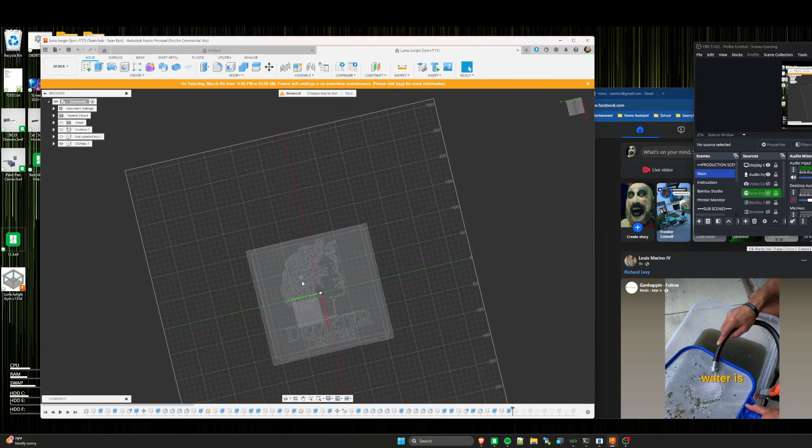What I'm thinking is, if I make this flat and you do multicolor, I can cut this right here, add little tabs, and then holes in these so you can snap them and glue them together. I could make snap tabs, but that's going to be a lot more difficult to do.

So let's do this. Let's start by making these flat. Let me see what you've got here.

Okay, so that's some kind of box. All right, I don't need to worry about that. What am I on this? Okay, so this is what I'm on. I've got one body.

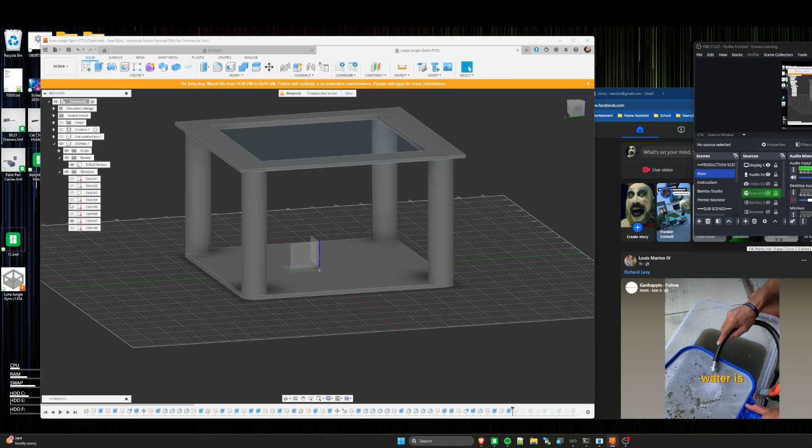Why do you have so many sketches? You have a lot of repetitive sketches. I don't know if that's on purpose.

Yeah, see this one, where is it? This one and this one, just do it in the same sketch. You can just make one sketch with both the rectangles. You don't need a bazillion sketches. This could be done in that same sketch.

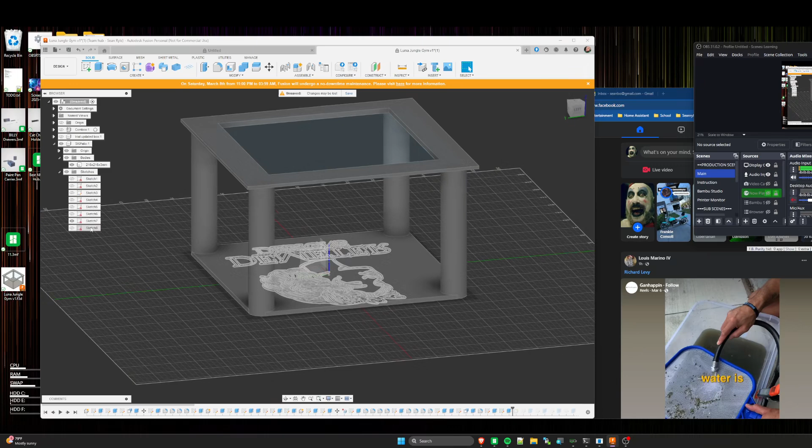Okay, that makes sense. I need to see all these sketches. It helps also if you name your sketches too, like you did these other guys, like the body.

All right, so let's start with this. We're going to start with this. We're going to make this flat.

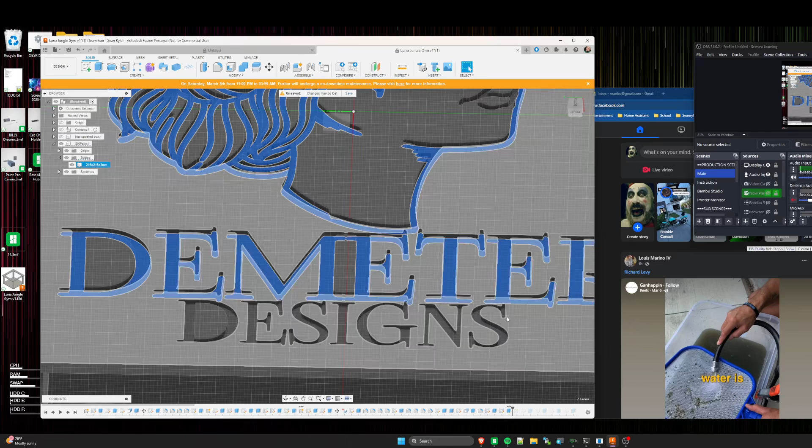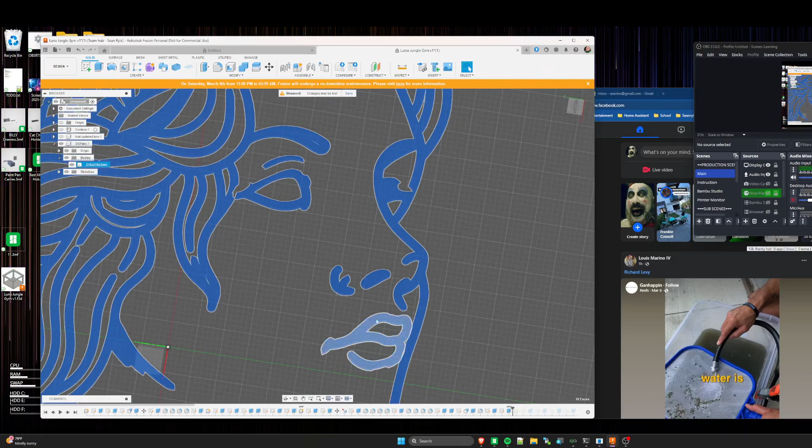So I'm just holding Control and selecting these faces. Make sure not to select any lines, you just want to select the faces. Make sure I get them all. I think I got them all.

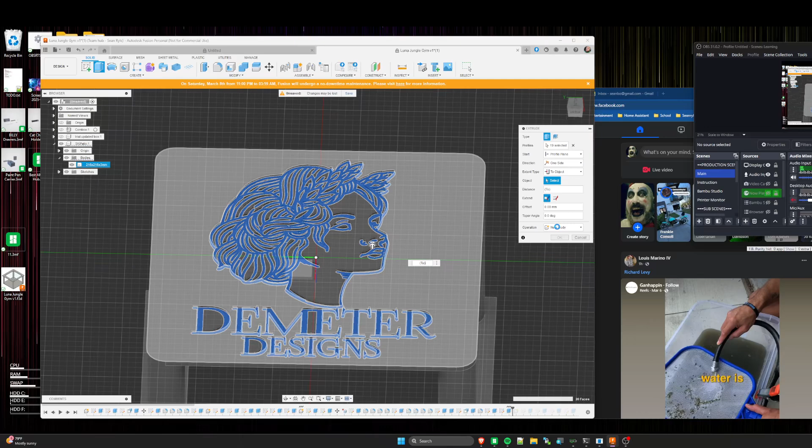Okay, so now I'm going to do an extrude, and I'm going to set type to object, and I'm going to select the face, so that's what it's going to be flush with. And then I'm going to choose, as soon as it stops spinning, choose new component, and hit OK.

All right, 20 faces, that sounds about right. So it's calculating. You can see down here it's calculating.

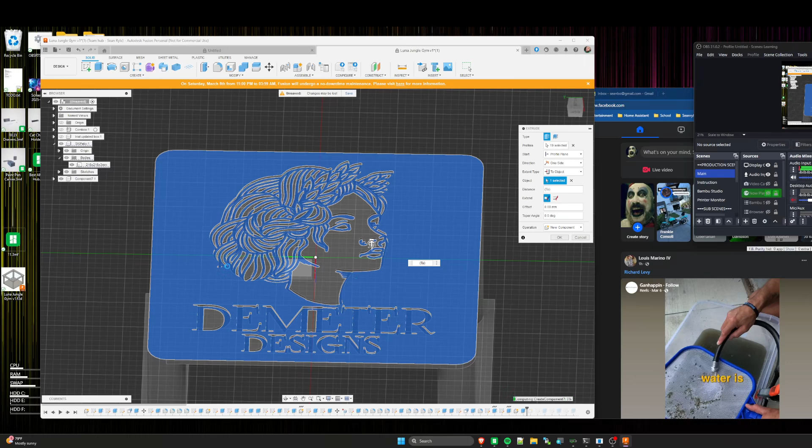So by doing it as a new component, this actually will allow you to do it either way. So when you export this, if you want it flat, it's going to create a body for each one of these faces. You can't get around that because they're not really joined in any way. You can't combine them into one body, which, it's actually okay.

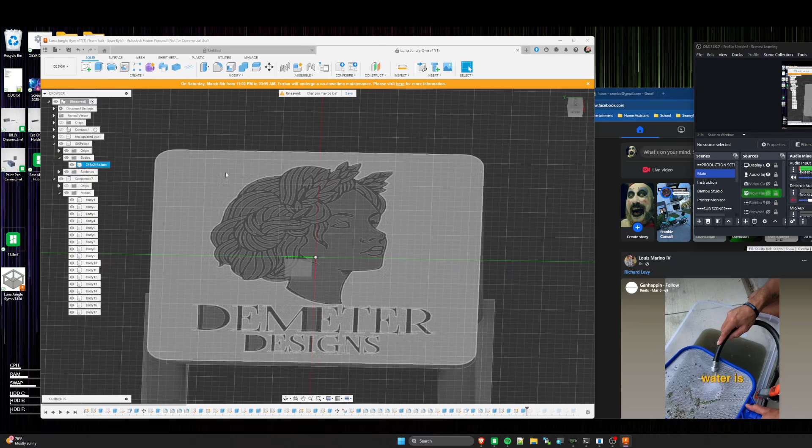So what you can do, if you want to export this flat, make sure all these are visible and this body for this thing is visible. If you want it debossed or embossed, whichever way it is where it goes in, just hide all these bodies. So when you export it, it'll export it with the holes.

So you can have it both ways, you don't have to do it one or the other. It just depends on how you export it. You want to export it for multicolor, make sure these are all visible. You want to export it so it's embossed and you only have one color, turn all these off.

So I'm going to do this. I'm going to call it logo. I'm not going to rename every one of those.

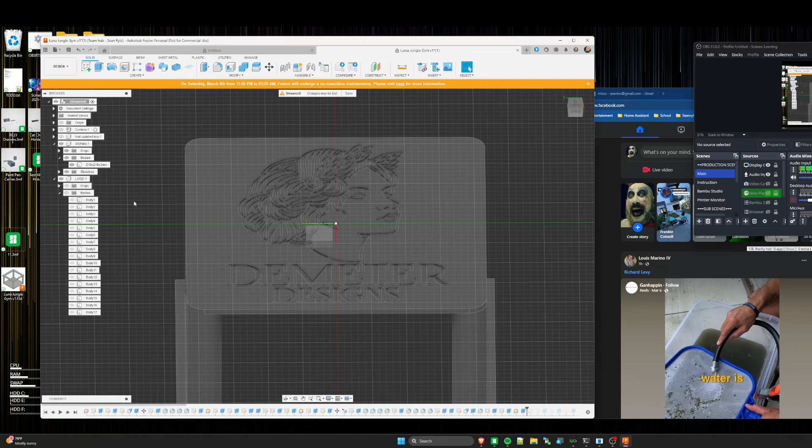Okay, so I'm going to leave these visible because I want to export it that way. Now, what we're going to do is I'm going to cut this into two different bodies. So here we'll see two different bodies.

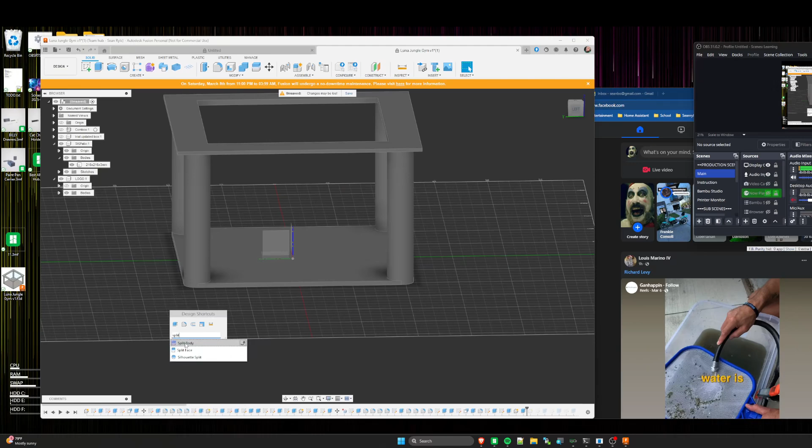Okay, so what I'm going to do is I'm going to hit S, and I'm going to type split body. Okay, so here, split body. I'm going to select this body, and it says splitting tool, I'm going to hit select.

And I'm going to use this face to split it. So it's going to split it at the very bottom, or the very bottom of this thing, right here along this line. Okay.

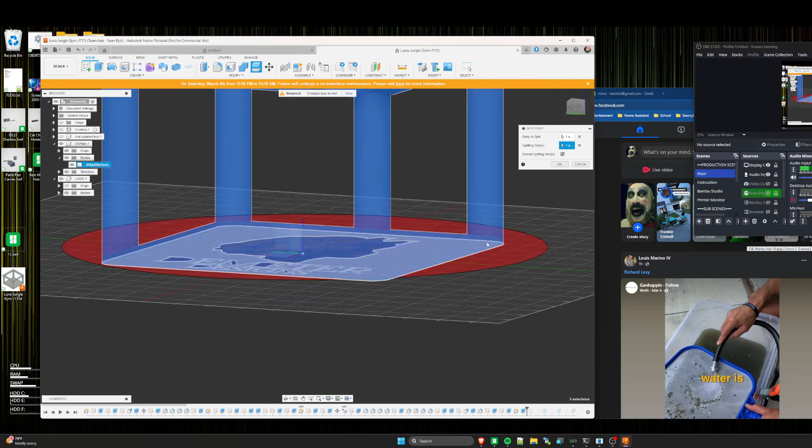So now you see we have two bodies. You have the top portion and the bottom portion. Okay.

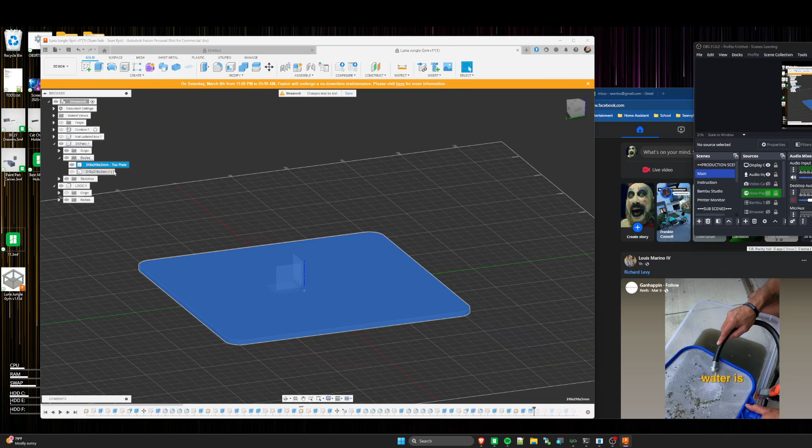So let's do this, I'm going to call this top plate. And I'm going to call this, I don't know, bottom assembly. Okay.

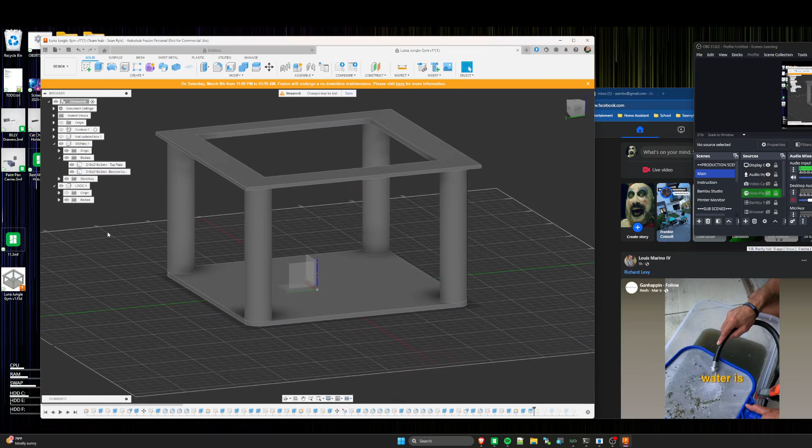All right, so now that we have these separate pieces, what we can do, I'm going to create a sketch on here. Create sketch. Where's that sketch you had with the circles?

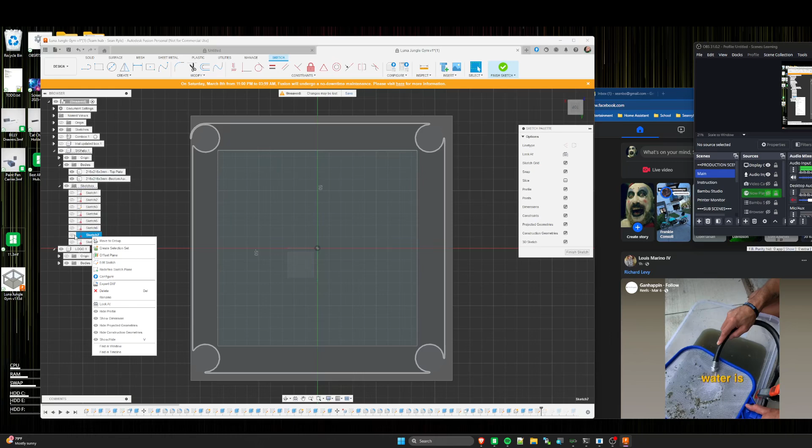Okay, so here, I want to make this sketch visible. I'm going to hit S, and I'm going to project.

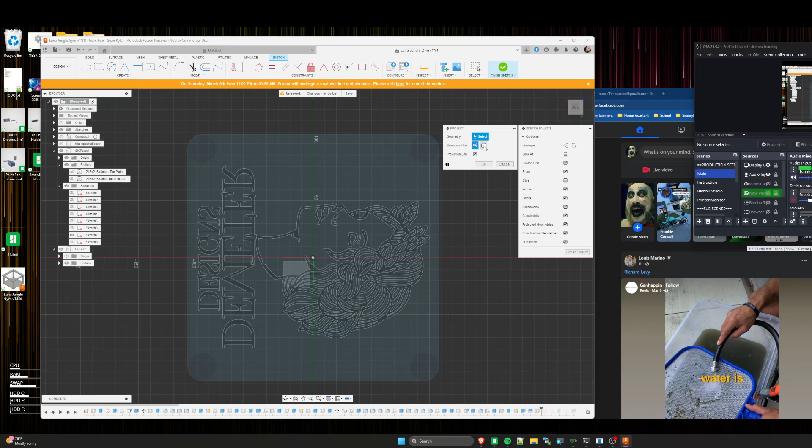Let me hide. Why did it do that? Bodies. I want this. That's not going to work.

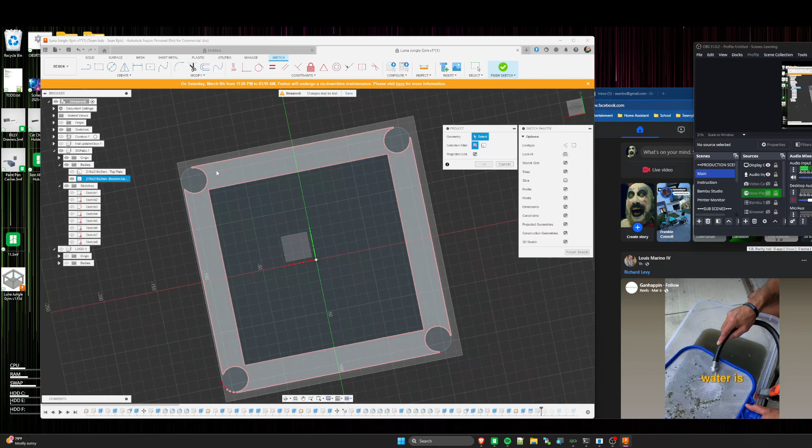Okay, this is what we want to do. Let me hide that, I don't actually need that sketch. So I made just the bottom assembly piece visible. I'll explain why I'm doing this in a second.

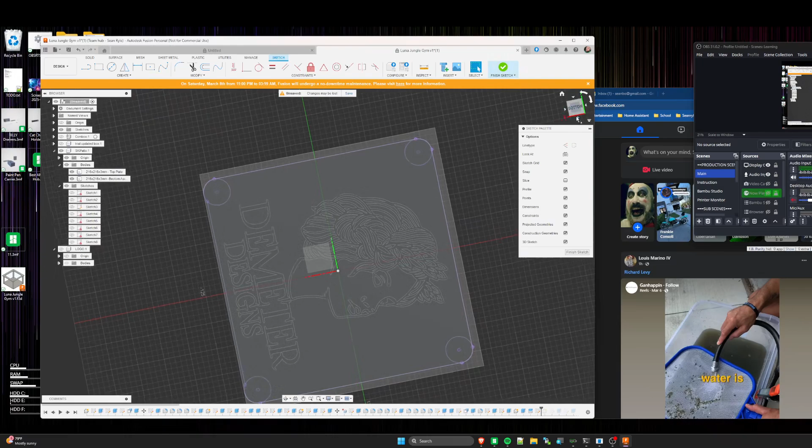This is called project. So what this is going to do, I'll hit OK. On my new sketch here, these bodies don't need them anymore. I now see the geometry from that other sketch.

So what that's going to do is allow me to line up holes with the center of these things. I actually didn't need to project these outer lines, I could have just projected these 4 circles. So that's going to allow me to create pegs that line up with the center of these things.

So let's see, 6, 10. Is 10 too big? Yeah, let's make them 10.

Okay, so here's the little trick. Now you can go create 3 more circles - it would be very quick. But let's say you had 100 of them to do.

Okay, so here's a quick way. Let's do it a different way. I'm going to create a line. Then I'm going to select that line and hit X. This creates a construction line.

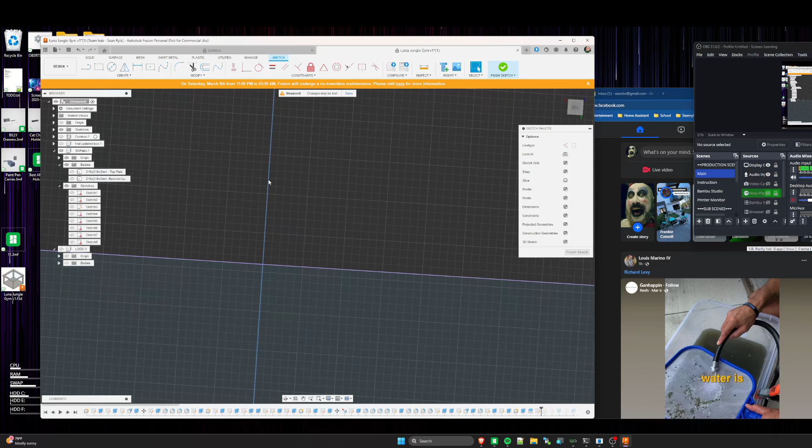You can see it's, well, you can't see it, I've got to zoom in. See how it's dashed? I don't know if you can see that, it's pretty small. But you see it doesn't cut this into two pieces. Whereas if I hit X again, if it's a regular line, it cuts this into two pieces. So I hit X, it's now a construction line again, it's still one piece.

So I'm going to do this again, this way. And I'm going to select the line and hit X. See, it's still one piece. You can see it's dashed now, that's now a construction line. Why did my stupid mouse keep acting up?

Okay, now watch this. I'm going to select this circle and hit this mirror button. See, it says the circle is selected. I'm going to select this line. Select the circle, mirror line, I'm going to select this. Now look, it created my circle for me. I'm going to hit OK.

So I'll do it again. Mirror line, created this one for me. So now I'm going to select this one. Mirror line, and this one.

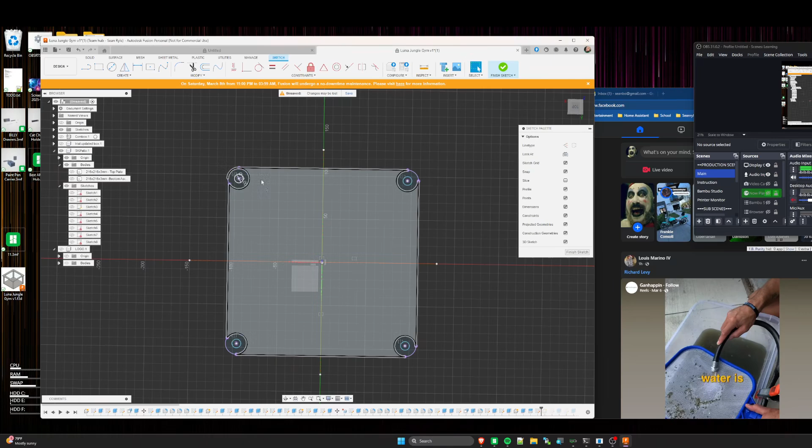Okay, so here's what I'm doing, I'm going to finish the sketch. That's all I need for this. So now, okay, here's our top plate, right? So I'm going to extrude little tabs out of this - pegs, I should say. So I'm going to extrude.

Let's see. Yeah, I think 10 millimeters is good. Okay, and I'm going to select these.

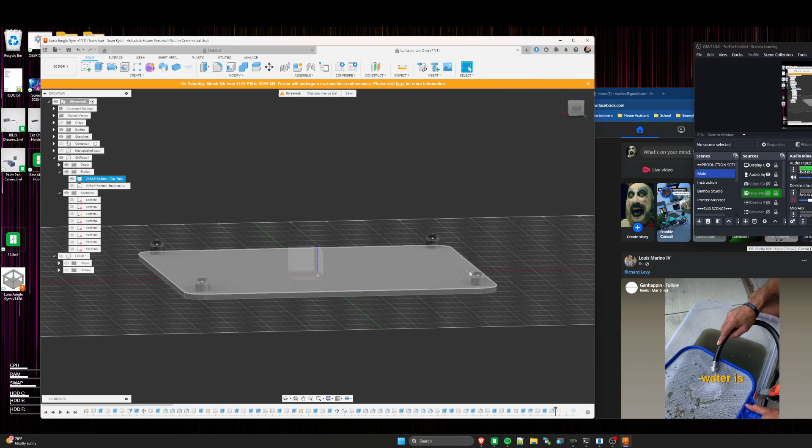And I'm going to put a fillet. Let's say, yeah, that looks good, 4. Okay, so now we have these kind of smoothed off pegs that can be inserted into those towers.

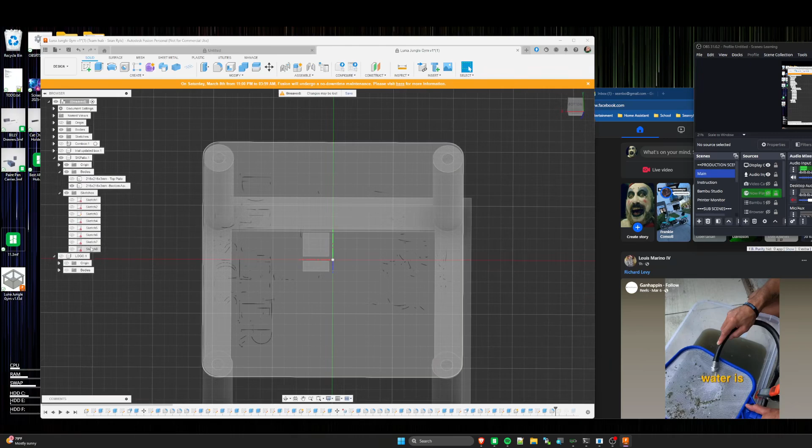Okay, then I'm going to hide this because I don't need it anymore. I'm going to bring this back up and bring my sketch. Where'd my sketch go? Which sketch was it? Son of a bitch. Oh, that is the sketch. Is that the sketch?

What the fuck did I do here? Oh. Yeah, I did the classic blunder that I told you to watch out for. Let me undo this - Control Z, Control Z.

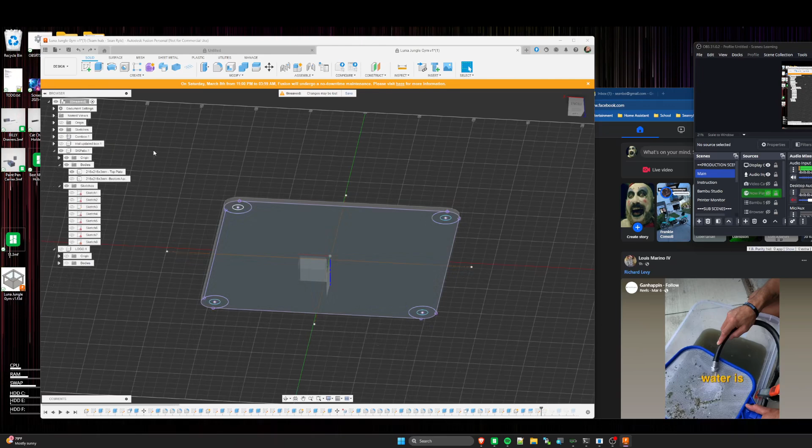Okay, I need to select this part. Okay, so I'm going to do that. I'm going to do that again. Sorry, I hope that isn't confusing. Okay, so what did I do? 10? 10. I'm going to choose join.

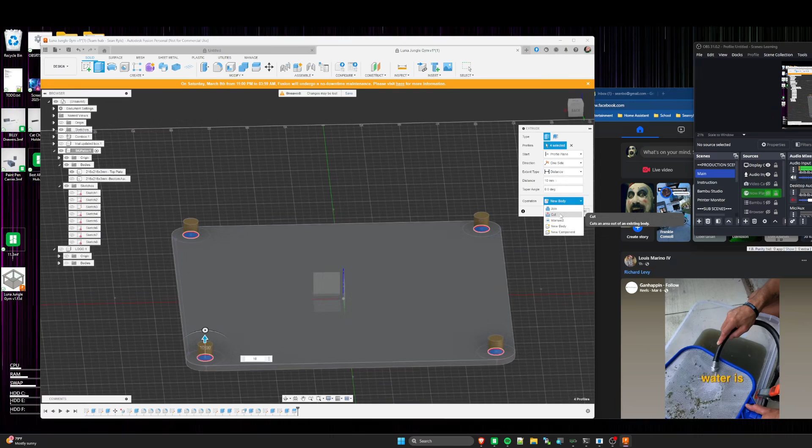Okay, and then I'm going to fillet. Or, okay. Good, so it's still one body, right? Yes, okay. Now I don't need that body anymore, now I want to work on this one.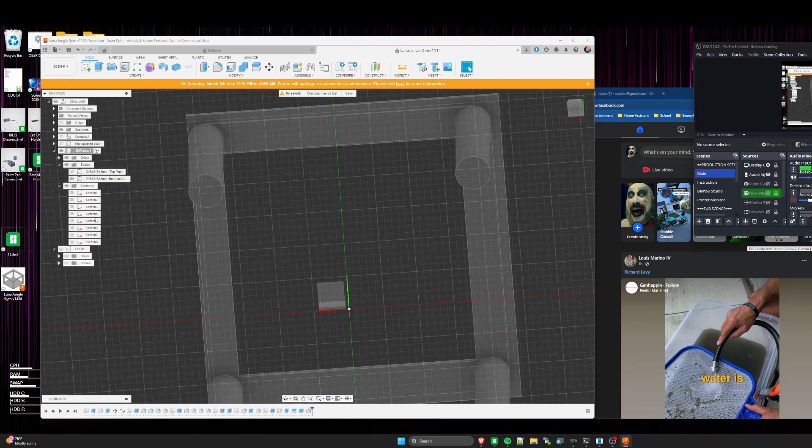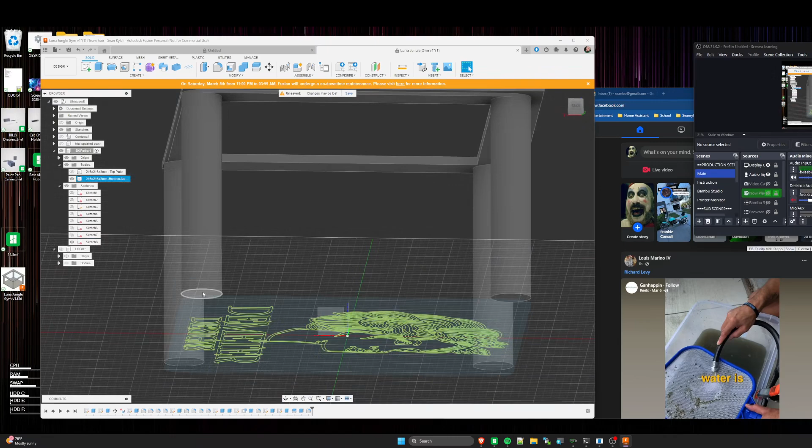Okay, so right, ignore all this text. So you see when I hover over these, I get the dots, right? So now we'll just do the same thing. I'm going to - that's not it, it's not the sketch I want. I think the sketch I want went up here. It sure did, because I didn't have this component selected. That's okay.

Okay, so now I'm going to extrude and cut into it. Now, if you remember, we made the pegs 10 millimeters tall. We don't want to make these holes exactly 10 millimeters, but I'm only going to extrude them 10 millimeters. Then we're going to add a tolerance to it.

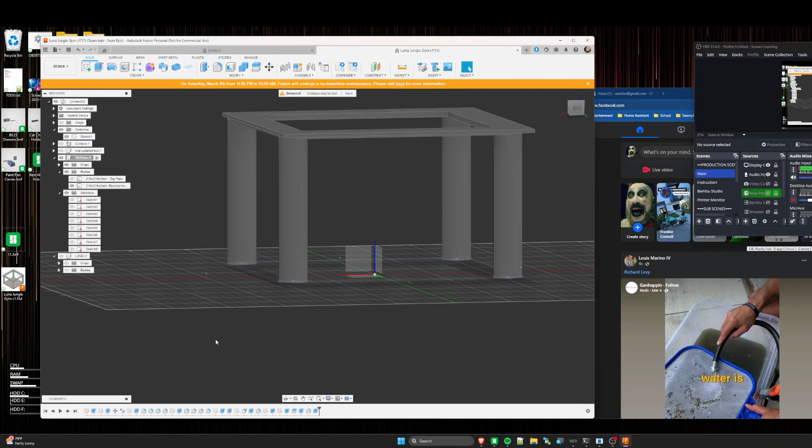Okay, so here's what I'm going to do. 10 millimeters. We don't need to fillet these holes. That doesn't matter. Okay, so now I don't need the sketch anymore.

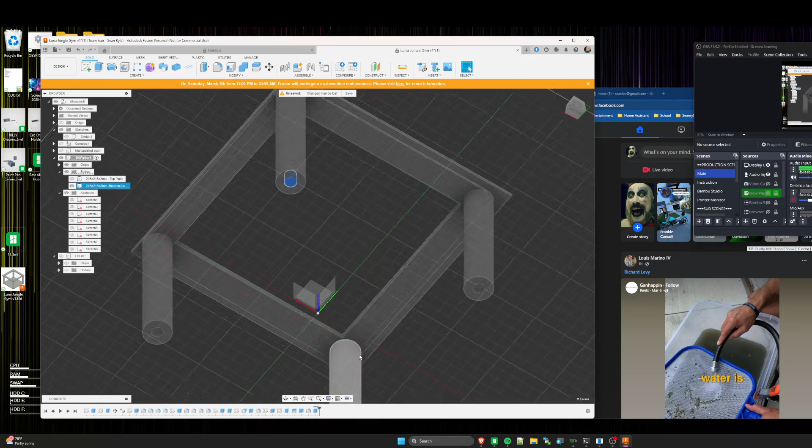Now what I'm going to do is select this face and this face, so I have both faces of the hole. You have the whole hole. I have this base face here, and then the side, round side face. I'm going to do that for all these. I'm going to hold Control and select those.

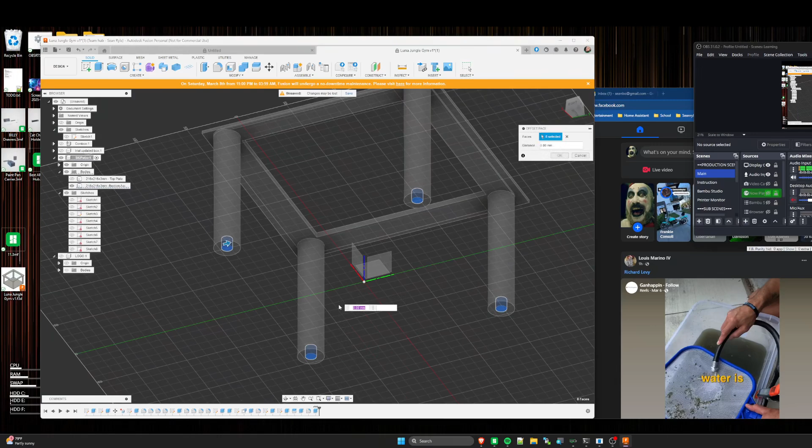Okay, now I've got those selected. I'm going to hit S, and take Offset Face. Now it's asking us how far we want to offset it. I think 0.1 should do it. Perfect, oh, there we go.

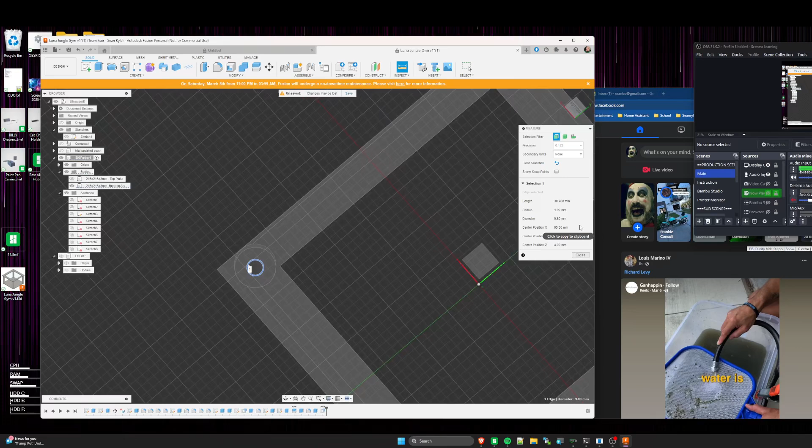So now if I hit S, measure, and I measure this diameter... that's not helpful, is it? That's not measuring what I want to measure.

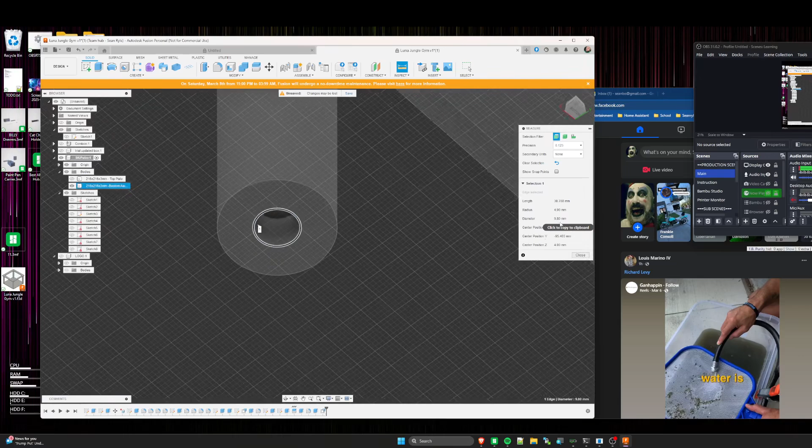Oh, it went the wrong way. I offset it the wrong way, it has 9.8. All right, so I'm going to undo that. Select these out again. I meant to do a negative. My bad.

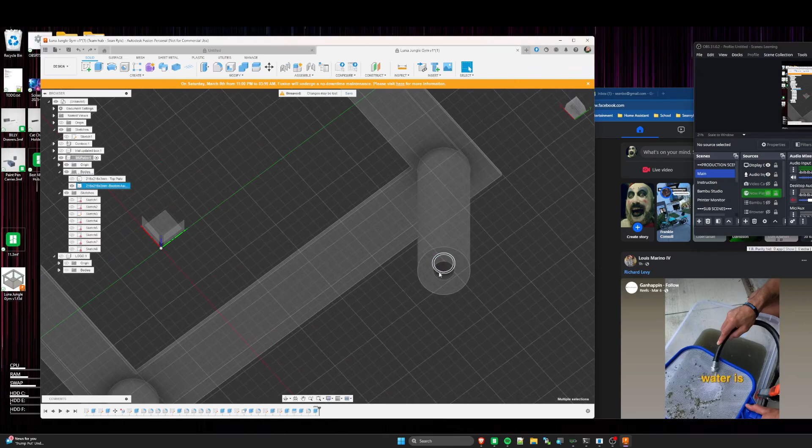Okay, this offset, make sure I have them all selected. Yes, I do. Offset face. What did I do, 0.1 minus 0.1? Oh, there we go. Okay, so now if I do a measure...

There we go, 10.2 millimeters. So keep in mind, when you do an offset of a circular object, the offset is for the radius. So when I offset it by 0.1, it made the whole hole 0.2 millimeters bigger. It'll give you a little bit of play, but it should still be enough.

You're going to glue it anyways, right? You're not going to just shove it together. We can make this a little bit less and you can just shove it together, but since it's going to be holding the weight of an animal, I think you should glue it.

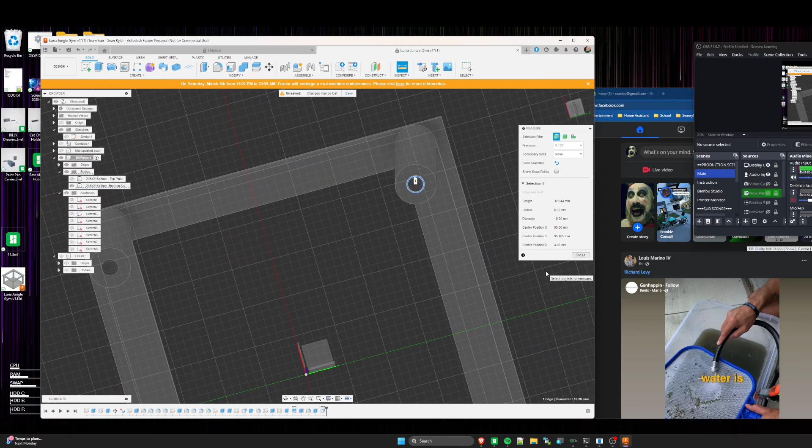Okay, so now, if we bring this, they can lock together. Let's see, I can do an inspect. Inspect... oh, what was it called again? I don't remember. There's a way to cut through this and inspect. Section analysis, there we go.

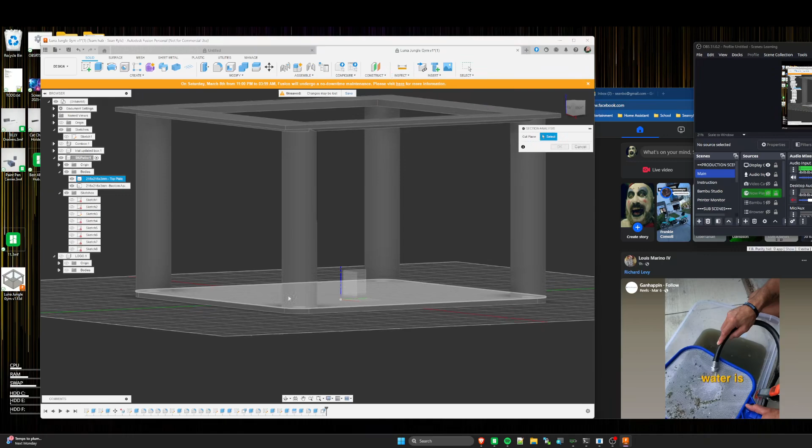We'll use that. Okay, so there you go. So this is the peg, and that's the hole, and you see there's a little gap. Right, so that's what we wanted it to be.

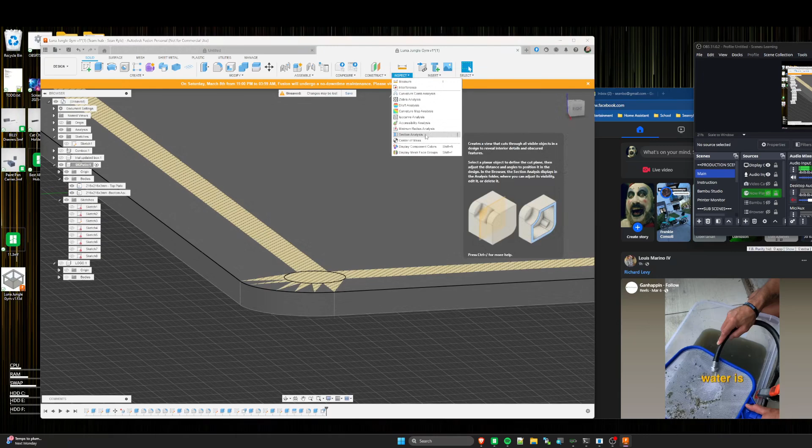Now I forget how to get out of this section analysis. I forget how to get out of this stupid thing. Yeah, it's gonna make me save it, isn't it? Okay.

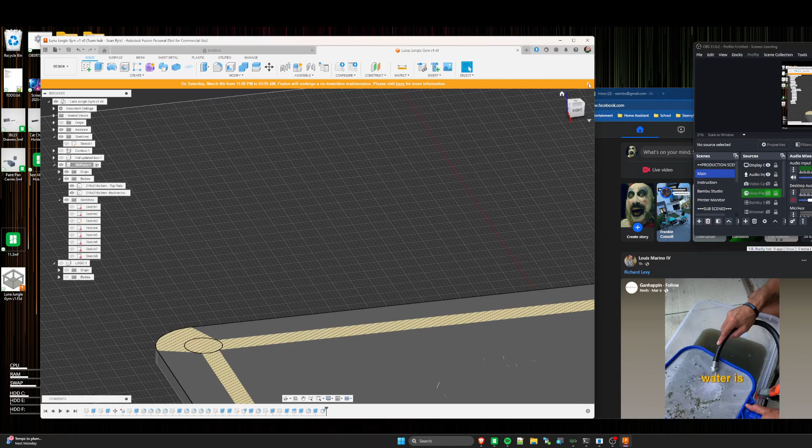I know somewhere there's a... I gotta click something. Get out of this section analysis, and I don't remember. Oh no. Fuck it, I'm done anyways. I'll figure it out. Okay, so I'm gonna export. Oops.

I need to be sure the logo bodies are all visible, and both of your bodies are visible.

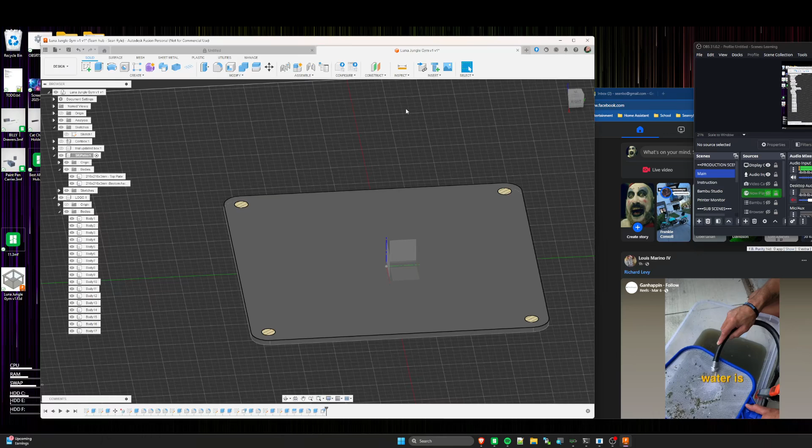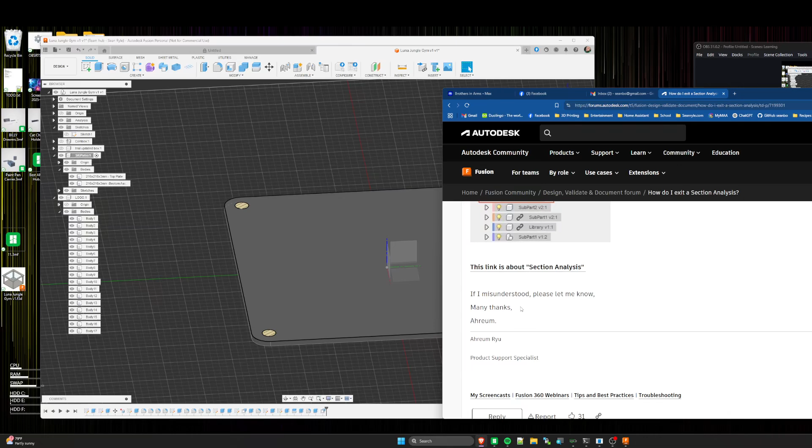How do I get out of this? Okay, I'm stumped, I don't remember how to get out of this. I'm gonna look this up. Fusion, exit section analysis. How do I exit section analysis? After creating section analysis. After creating section analysis, basic analysis.

Turn on and off the lamp. The view will be working. Oh, there we go. Okay. Yeah, I knew it was something like that. Okay.

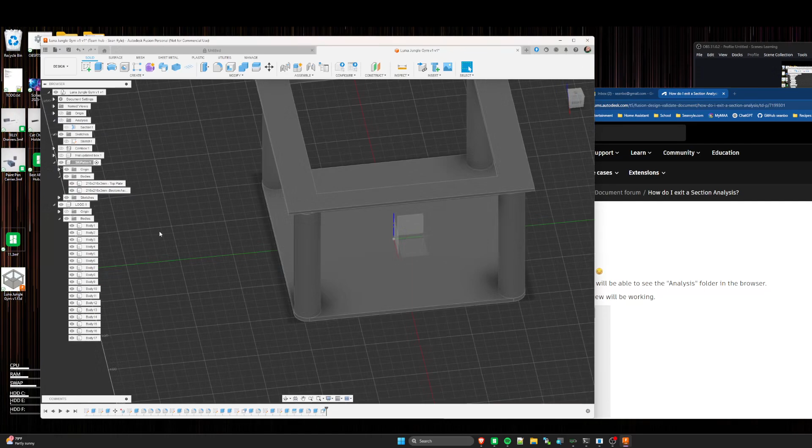All right, so just so you can see, I'm just going to temporarily move this, so you can see how they line up, right?

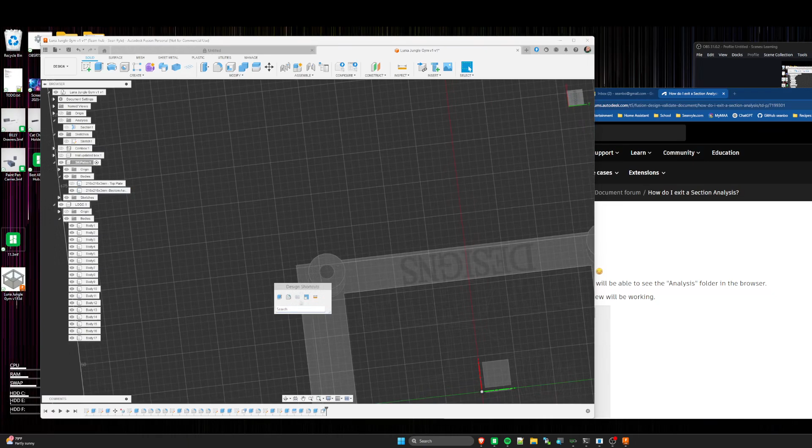Okay, so let's just do a quick double check. Measure, that's 10.2. Measure, 10 millimeters exactly. Okay, so the peg is 10 millimeters, the hole is 10.2 millimeters.

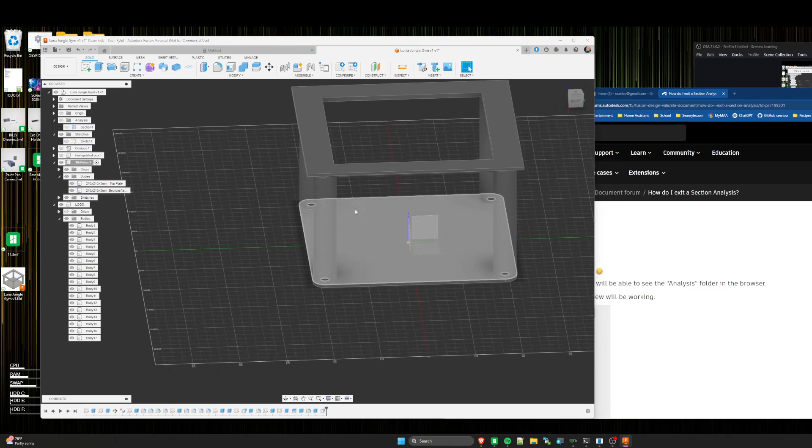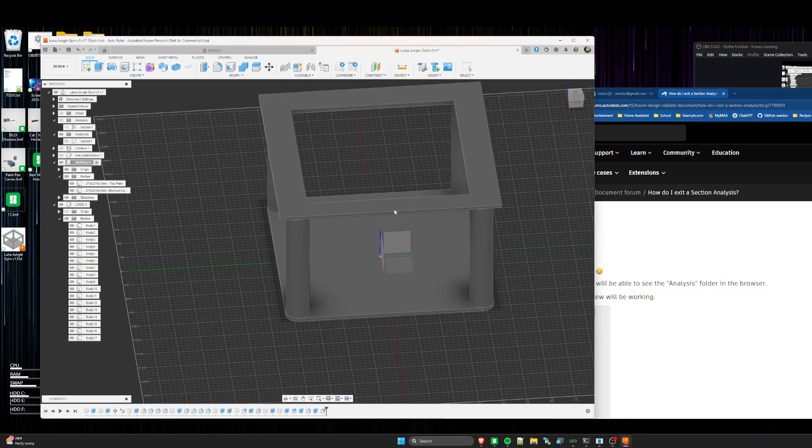So now, both parts are visible, the logo is visible, okay, all the bodies. So now, if I go to export, and if you can, always try to choose a STEP file. It's a higher resolution, so you'll get better detail, especially if you have your logo on there.

Okay, I hate when it rearranges my icons. Okay, so let's open this up in Bambu Studio.

Boy, that's slow. Definitely gonna have to compress this so I can video. Okay.

For such simple geometry, that shouldn't be taking this long. Well, I guess it's got the logo on it. That's kind of complex, Mr. Brown.

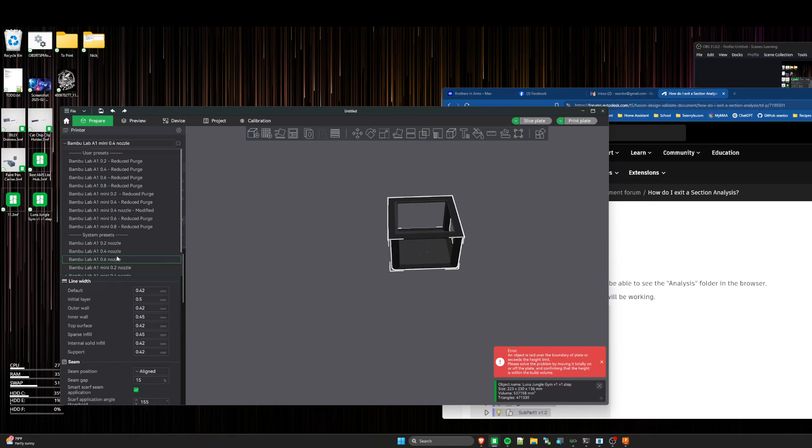A1. Okay, so now let's do this. We're going to split this into objects. We're going to create another plate.

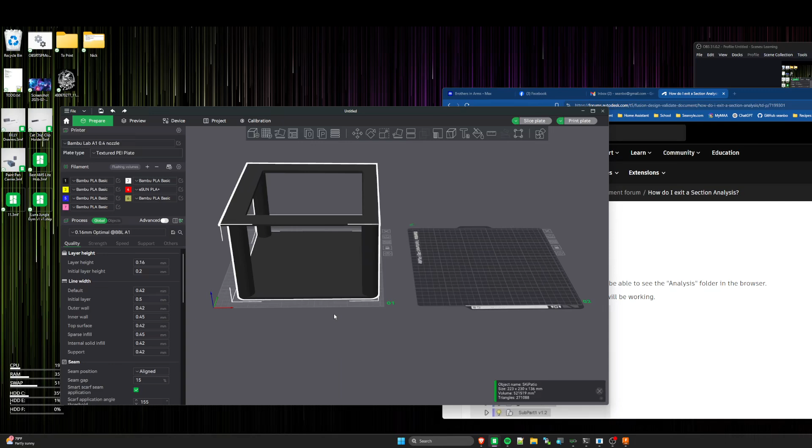Divide it. Son of a bitch, I didn't want to do that. I keep forgetting that. Let's do this. I forgot that's going to make this a pain in the ass.

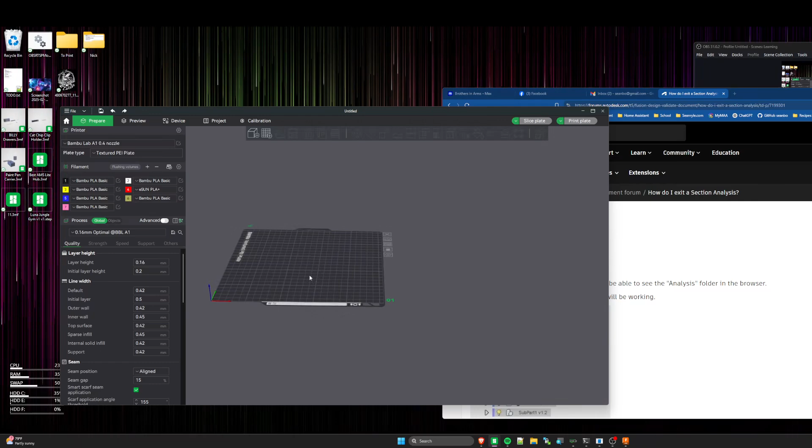I'm going to undo all this. Control Z, Z, Z, Z, Z, delete. We need to export this separately. All right, so we're going to export just this piece.

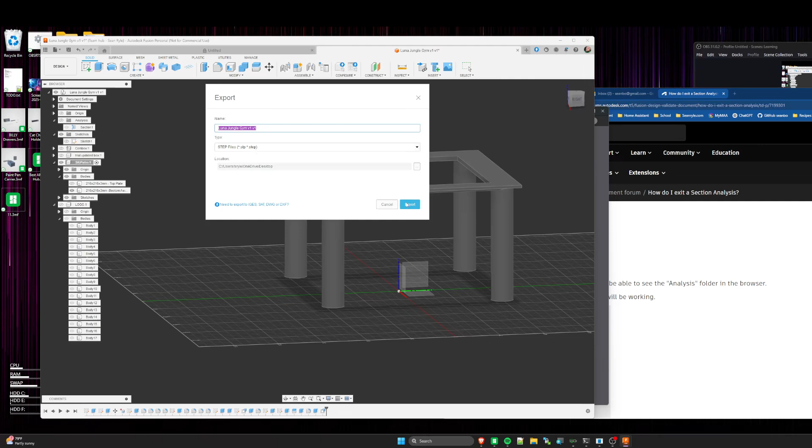The reason for that being the flat logo pieces are components of the other piece. They're separate pieces, so when I split it in Bambu Studio, because Bambu Studio is stupid and it splits everything, it doesn't leave them together. So it breaks all that shit.

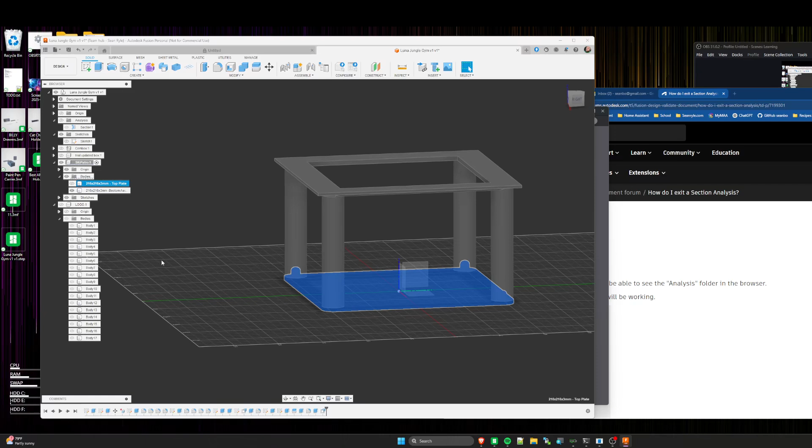I probably could move this body to this component and solve that, I think. But it's easy enough just to do this. So I exported this piece, and now I'm going to export all these pieces as one piece.

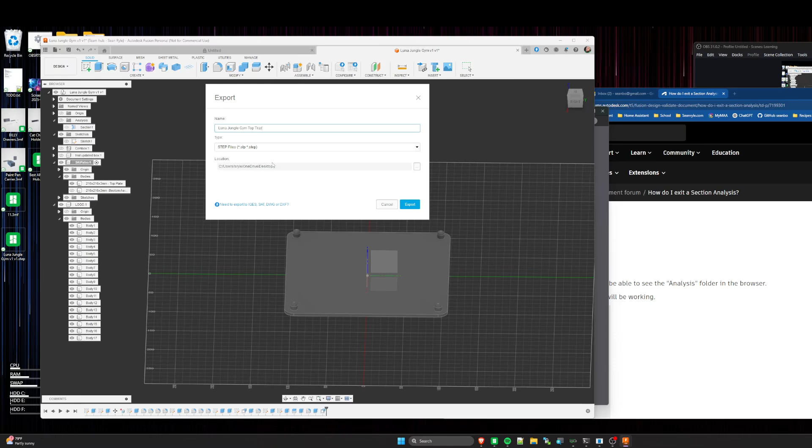Okay, so I know I'm going to need 2 plates, right? So I'm going to do the top tray. Yeah, see, I knew that was why it was taking so long. It's the logo.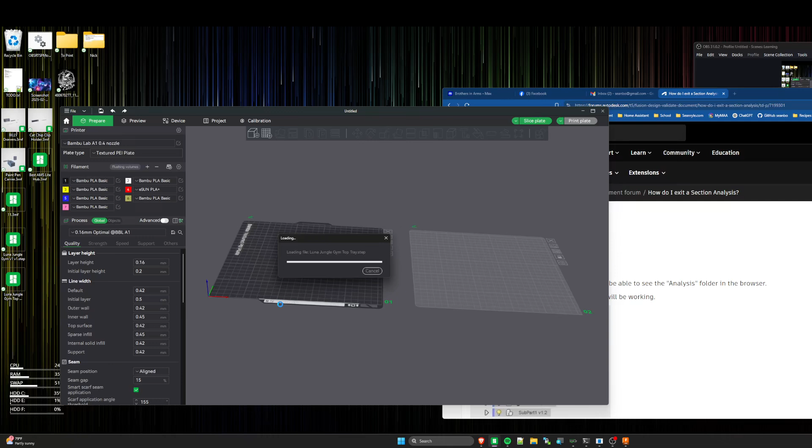Okay, I'm not going to print this at that resolution either. And now this piece.

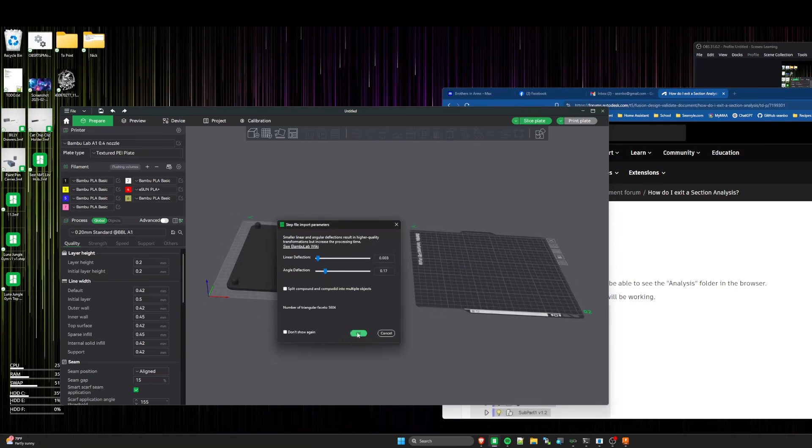Okay, so this we want to print this way. Okay, and you can see our pegs and whatnot. Now this, we'll just go into paint. Select the bucket fill, you can paint it whatever color you want.

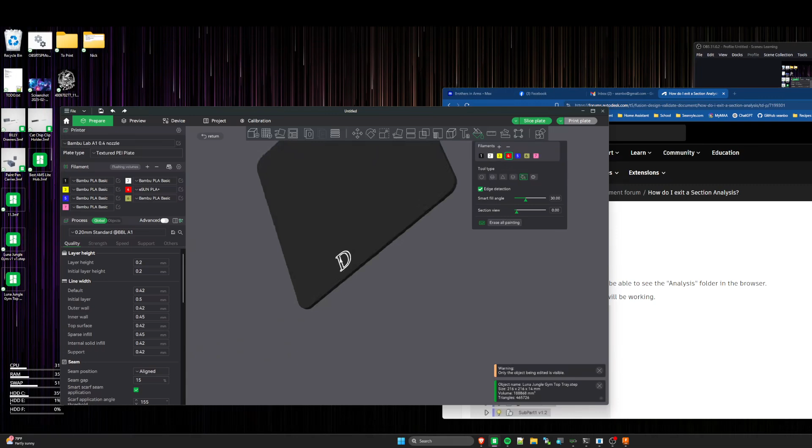Let's do this, let's make this easier to see. Actually, that wouldn't really do any good. That's okay, let's just go back to this. Paint.

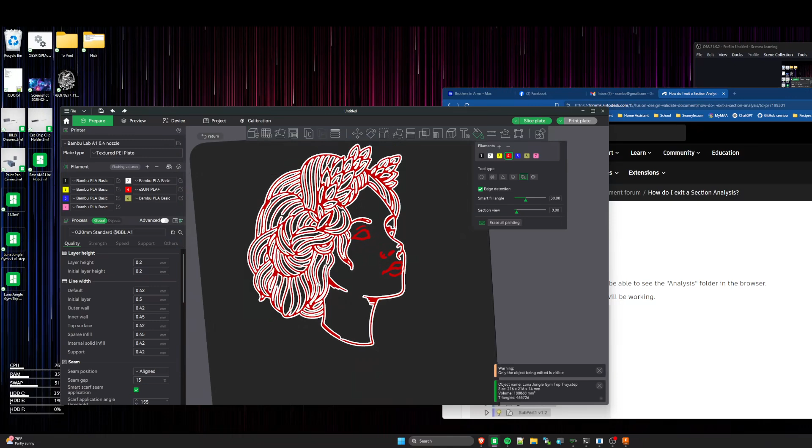That's all her. Yep, so...

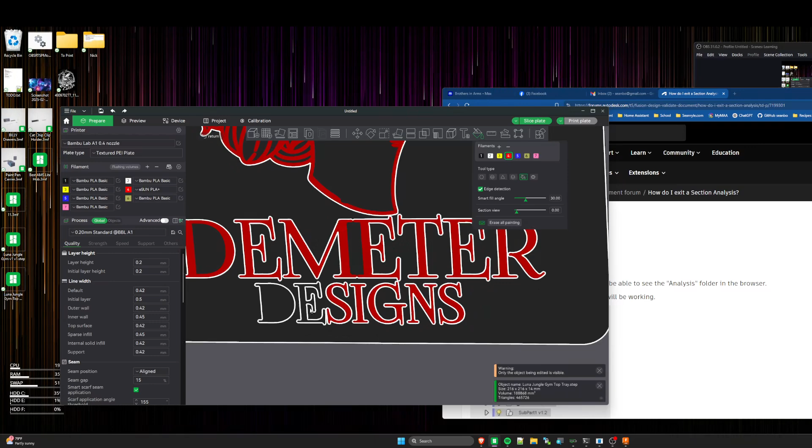I wish it would highlight them for you. Okay, so there we go. And print that face down. And there you go, that's how I would do this.

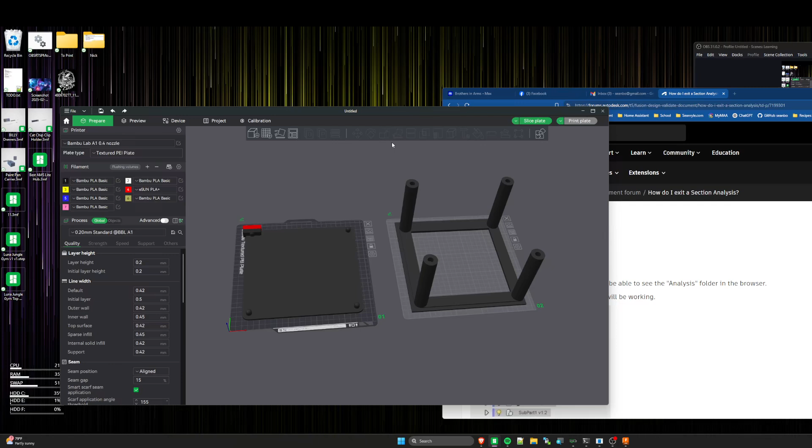So now when you print these 2 pieces, you're going to put glue in the hole, glue on the face, stick them together. Let's see, for the hell of it, let's see what we got here. Slice all.

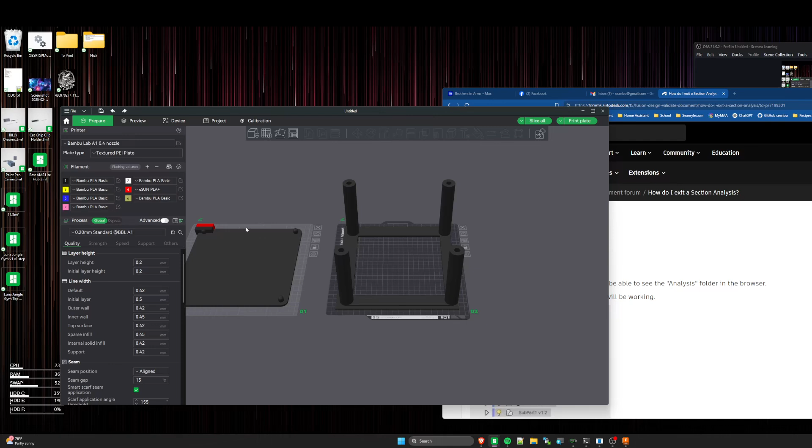Now, depending on the colors you use, if you use both dark colors, let's see, 272 grams of filament, but almost all of it's the black. And oh, you're gonna want to move this, it's hitting the prime tower.

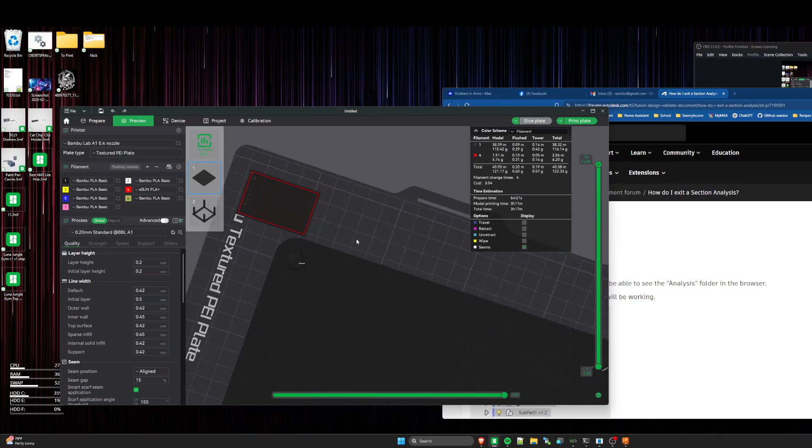Let's take a look at it. Okay, make sure they're not hitting. Okay, so... okay, what was I gonna say?

Oh, so if you use all dark colors or all light colors, you can flush into the infill to save some filament on swaps. Here we go. On the other tab, you go to flush options, flush into objects' infill. You can turn that on. Let's see if it saves any here.

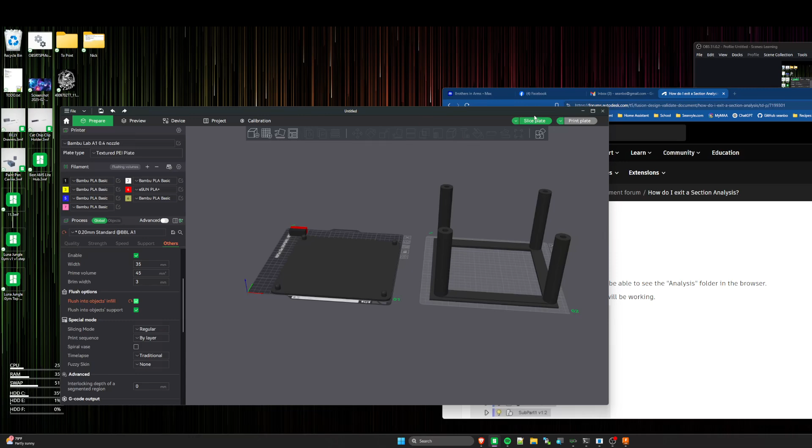I don't think it's going to save very much. Yeah, it saved quite a bit. So I saved 150 grams of filament. Oh, that's just on that.

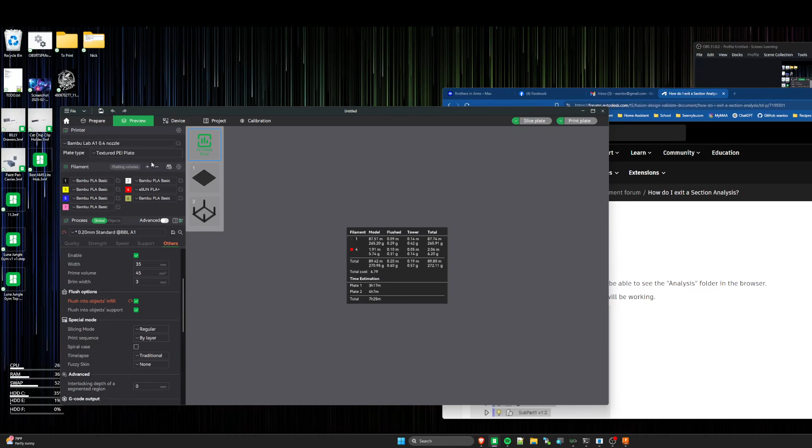That didn't seem right, okay, 200. Yeah, see, it didn't really save anything. 272.11, saved like 1/10 of a gram of filament. So that's wasted, I wouldn't even bother with that.

The other thing you can do is you can go to the flushing volumes here. So if you use... oh, mine's already set to 0.6. The default here is 1. If you use both dark colors or both light colors, you can lower this from 1 to something like 0.6.

I've had pretty good luck with that. This changes the amount of filament that gets flushed when you do a purge on filament changes. So this does 60% of what it normally would do. You can play with those numbers.

This tells you how many filament swaps that's going to do of each color. So the default would be this. Let's see, red from black to red, 412. We calculate... 247. So, you know, you can save quite a bit if you have it adjusted that way.